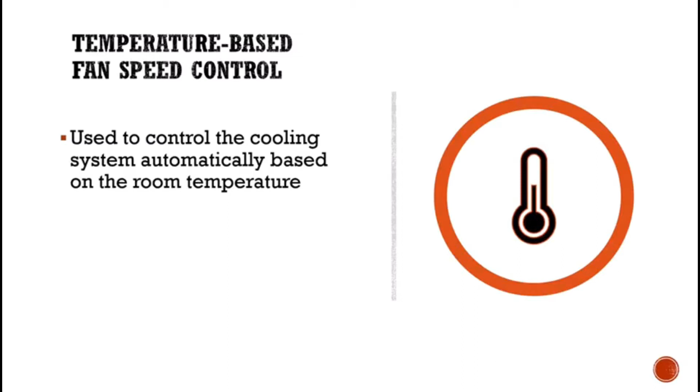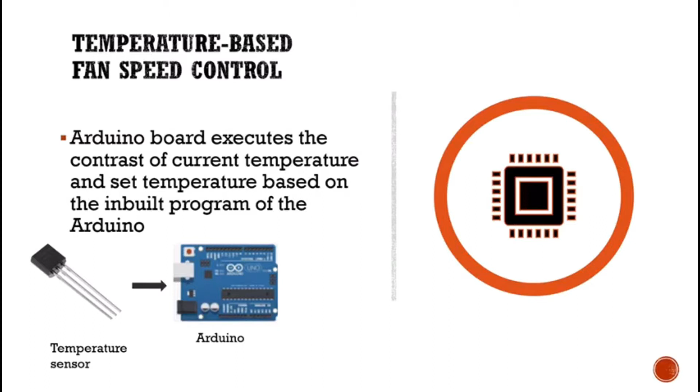The system uses a temperature sensor to detect the temperature of the room. The system uses an Arduino board to implement a control system. Then the Arduino board executes the contrast of current temperature and set temperature based on the inbuilt program of the Arduino. The generated pulse from the board is further fed to the driver circuit to get the preferred output to the fan motor.

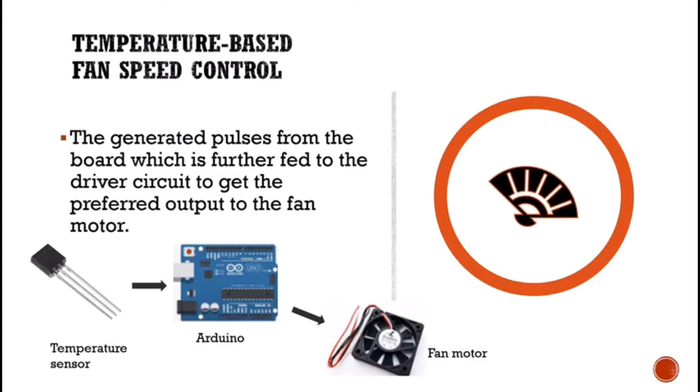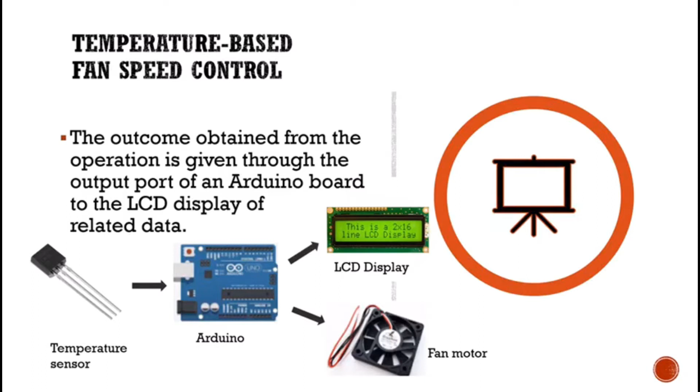The outcome obtained from the operation is given through the output port of an Arduino board to the LCD display of related data. Hence, the speed of the fan is determined by room temperature. As example, the speed of the fan will accelerate at the peak noon, but at night, the speed of the fan will decelerate because the temperature at noon is higher than the temperature at night.

Problem statement. Why use smart fan? Sometimes the use of electric fans is a waste of energy due to human attitude. People or users also mostly demand something that can be easily used without wasting their energy and time. Most people feel the inconvenience of changing the fan speed level manually when the room temperature changes.

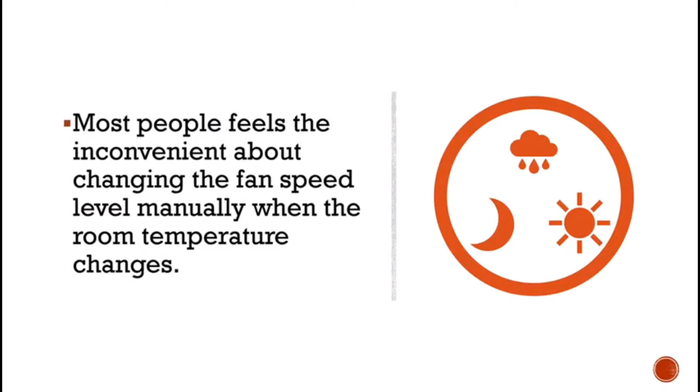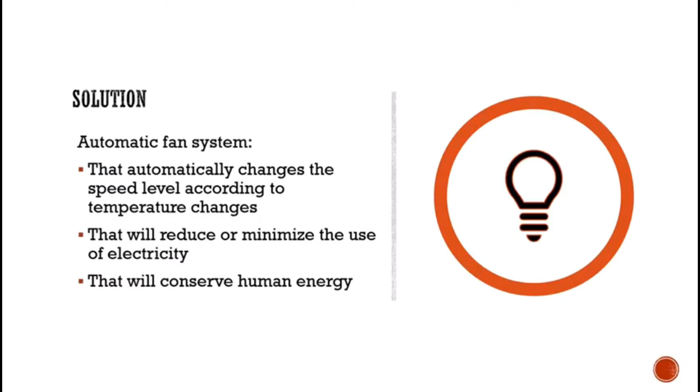In order to overcome the problems, this project developed an automatic fan system that automatically changes the speed level according to temperature changes. Then the system will reduce or minimize the use of electricity, and it also will conserve human energy. So, it is recommended to use smart fan to solve this problem.

Objective. The objective for this mini project is to study and apply the Arduino code and components in Tinkercad software for the specific product application. Second, to develop an automatic fan system that can change the speed level due to the environment temperature changes.

Third, to achieve comfortable surrounding air based on the environmental temperature and time. Next, to reduce and save the electricity consumption in daily use. Lastly, to save the time and energy for adjusting the fan speed based on their surrounding temperature.

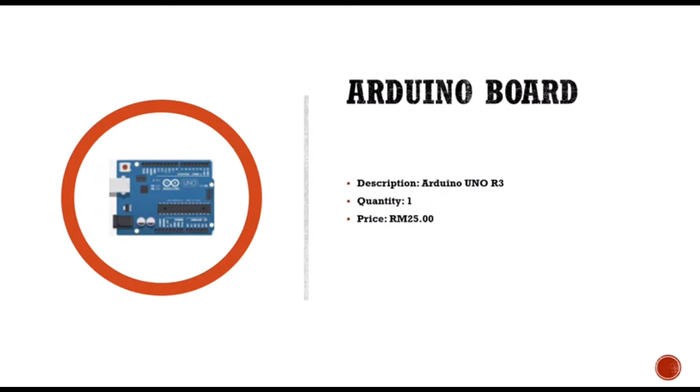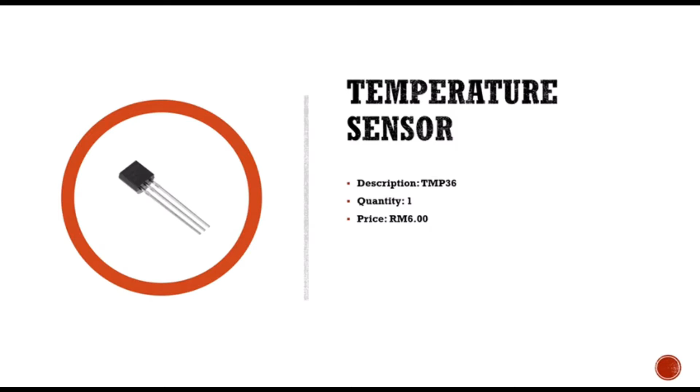Electronic component detail and cost. First is Arduino board. We use Arduino Uno R3 type for our mini project. Second is temperature sensor. We use it as the main component in our mini project. Basically, it is used to detect the surrounding temperature. Third is the LCD display. It is used to show the surrounding temperature and the speed of the fan.

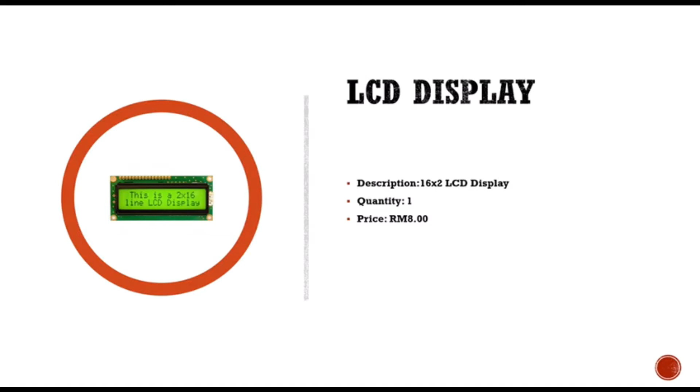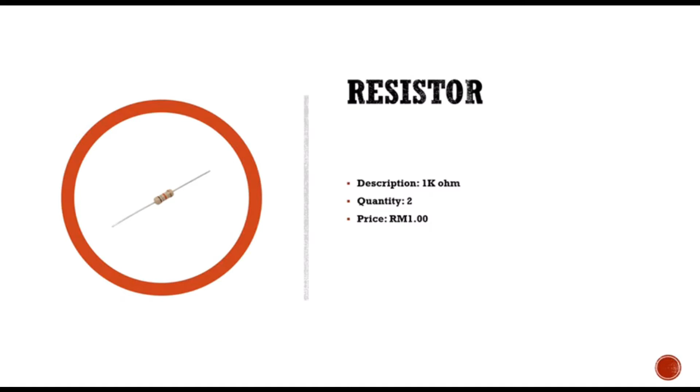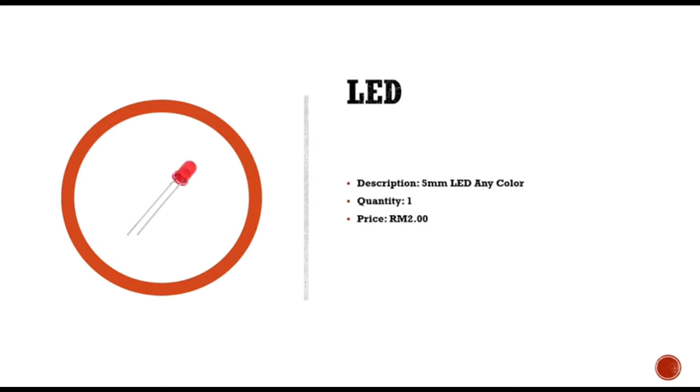Next is resistor. We use two resistors in our circuit of this mini project. Then transistor, diode, capacitor, LED, and power supply. We use a 9-volt battery or adapter as power supply in our smart fan mini project. Connecting wires. We use the connecting or jumper wire to connect our components in the circuit.

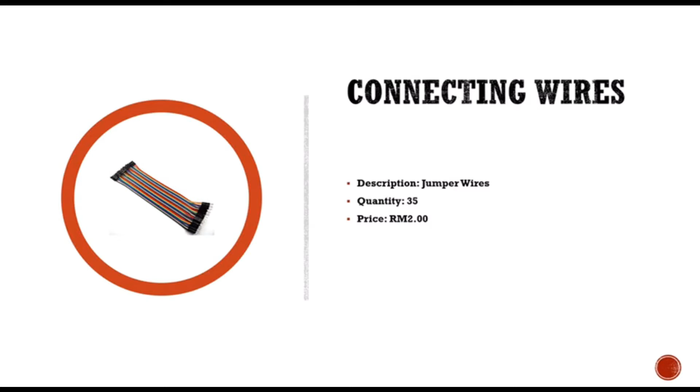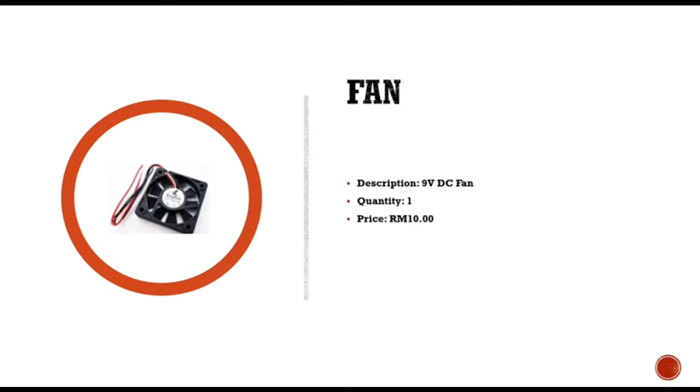And of course, we use a fan as our product is a temperature-based smart fan. And we use a 9-volt DC fan. Lastly is breadboard. We use it to connect all those components on it. Circuit diagram. So this is the circuit diagram for our smart fan mini project.

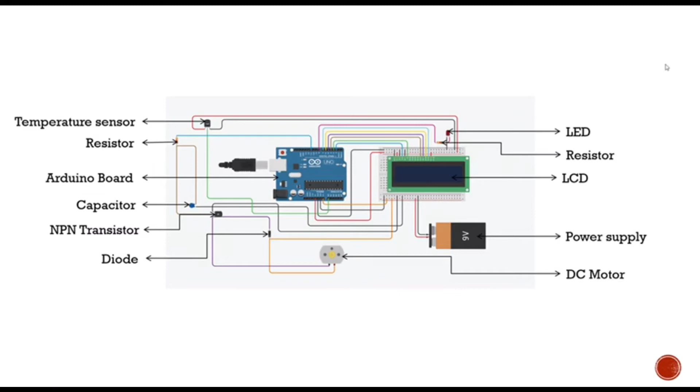As the system is running, the LCD will display the temperature and percentage of fan speed. At the current virtual time, 12 noon, we can see that the motor rotates at average 300 rpm. LCD is displaying the current temperature 34 Celsius and the current percentage of fan speed 73%. As we fast forward the time, we can see that the temperature is decreasing. So, at the current time, the LCD is displaying the current temperature 24 Celsius and current percentage of fan speed 30%. The motor is rotating at average 90 rpm.

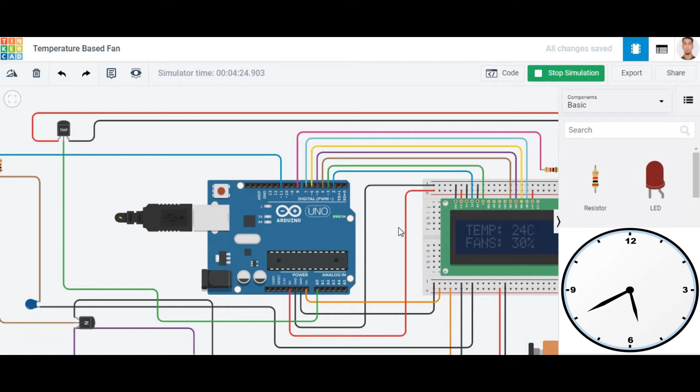The LCD then will continue to display the temperature and percentage of fan speed in real time. As we fast forward the time again, we can see that the temperature is increasing. So, for the current time, the temperature is 33 Celsius, so the fan speed will increase to 69%. So, the main objective of the system, to change the fan speed based on temperature, is achieved.

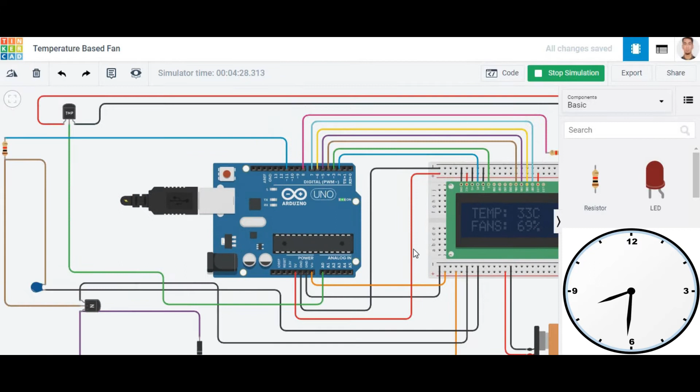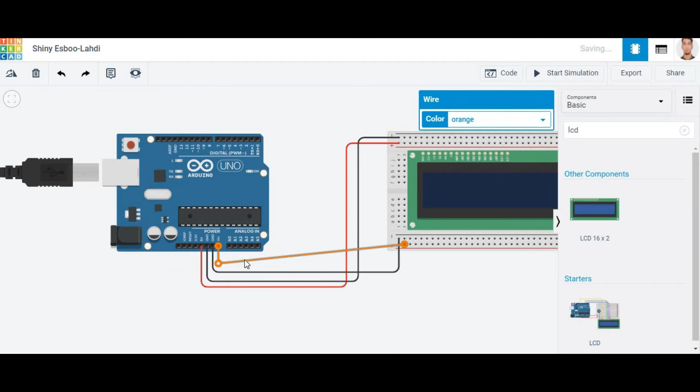First, take Arduino, breadboard, and LCD display. Connect 5-volt power supply, ground, and input voltage to the breadboard. Connect LCD to the ground and voltage common collector to the power supply. Then, connect each data bit to the selected pin.

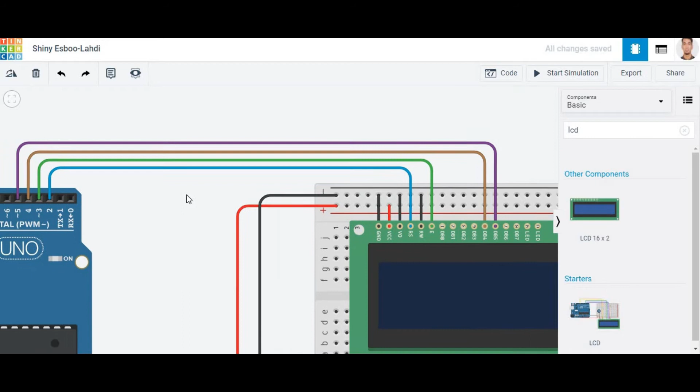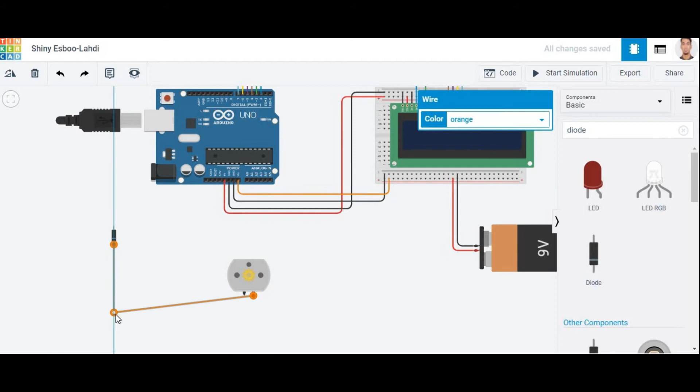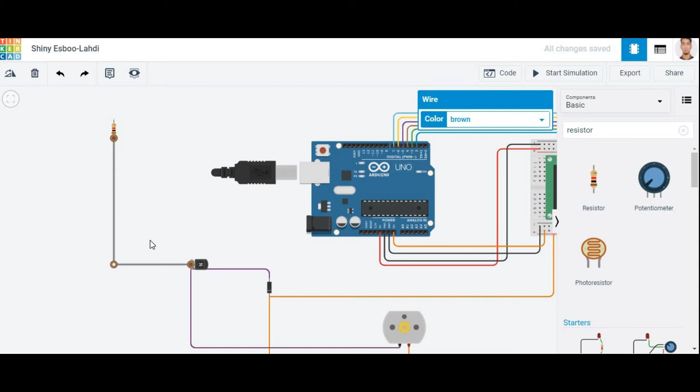Take battery and connect the ground and power supply to breadboard. We use DC motor to simulate the fan motor. Connect to the diode and input voltage. NPN transistor is used to amplify the weak signal entering the base and produce strong amplified signals at the collector end. The collector is connected to the positive input voltage. Connect the DC motor connection to pin 11.

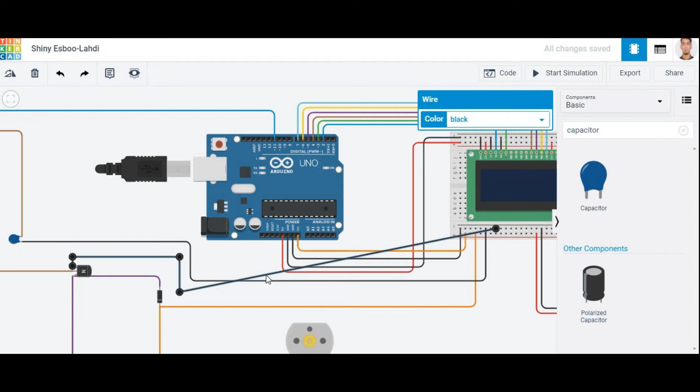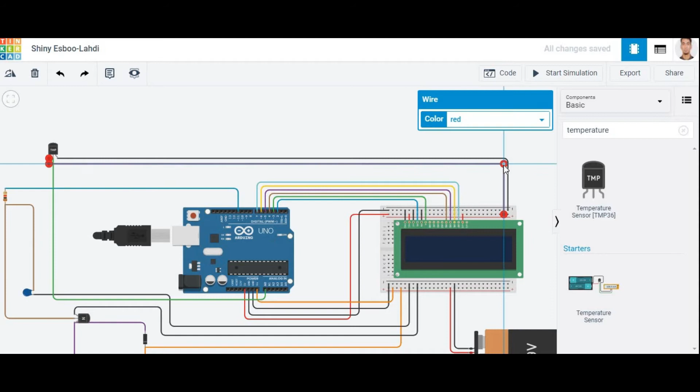Take the 10 mF capacitor and connect to the DC motor connection and ground. Connect emitter to the ground. Take the most important component, temperature sensor, and connect to the analog pin, ground, and power supply. Take LED and 1 kΩ resistance and connect to pin 8 and ground.

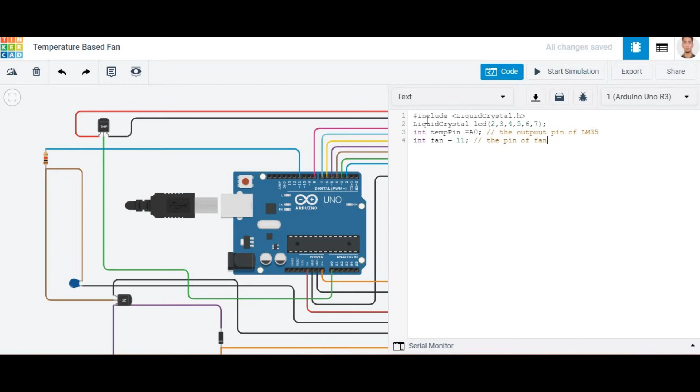Include liquid crystal from library to allow Arduino board to control the liquid crystal display or LCD. Define the numeric variables by integers. Use pin mode function to configure the pin into output or input. Make a loop function to make the function run over and over again. Set the range of temperature for the fan speed range. Use LCD print and its data and base to display the temperature and fan speed percentage.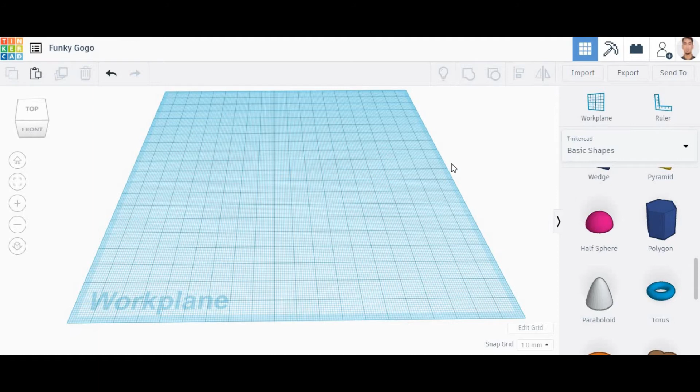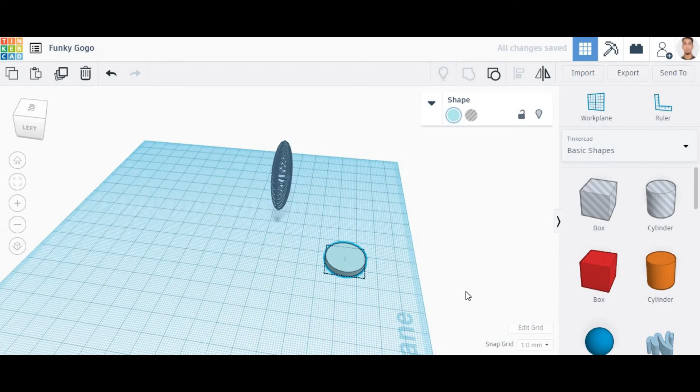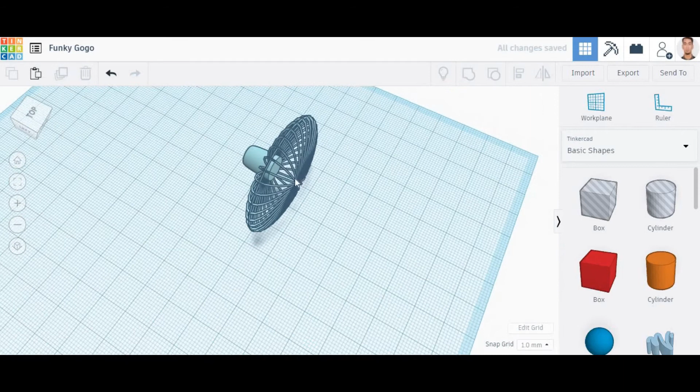Firstly, we make a fan guard. Fan guard is used to provide a physical barrier around spinning fan blades to prevent accidental contact with fingers or other objects. Next, we make a motor housing. Motor housing is to provide protection to the moving parts inside the motor. Next, we make a front cap.

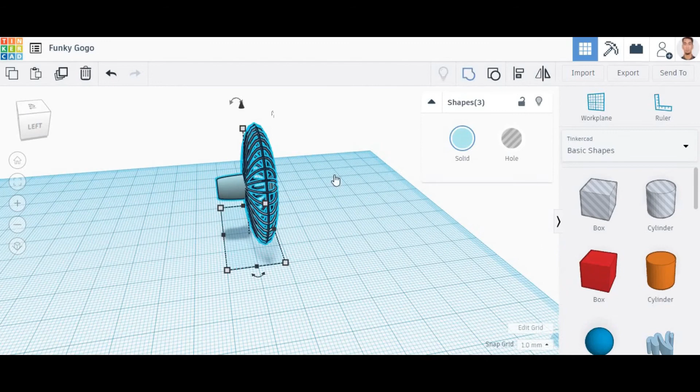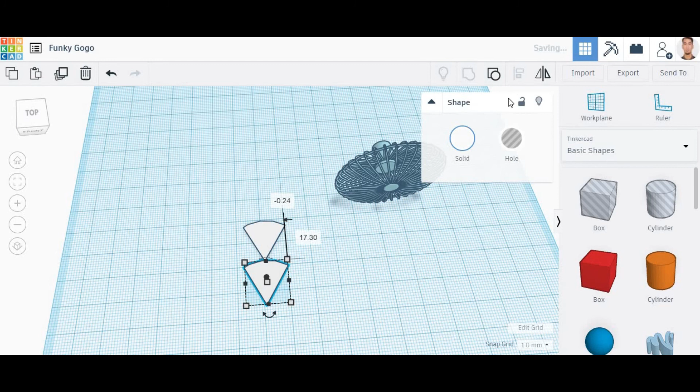Next, we make the blade for the smart fan. Smart fan uses 4 blades as it will be less noisy, so it will decrease the noise pollution.

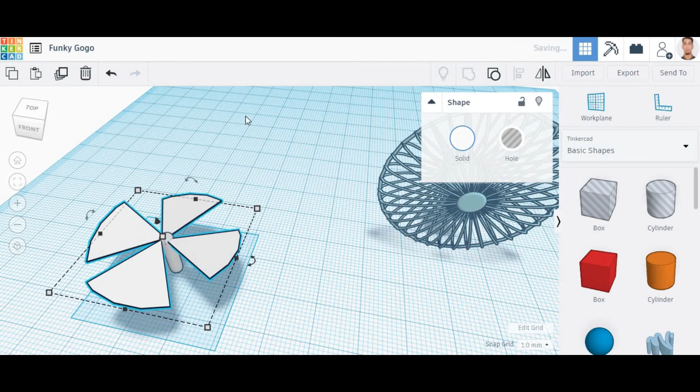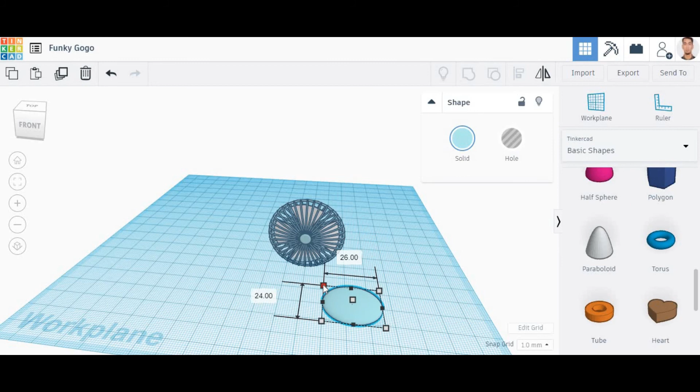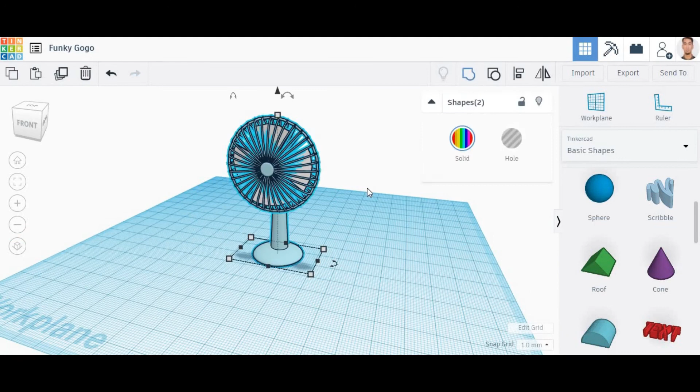Now we finish the upper section parts of the smart fan. Next, we continue the lower section of the fan. We make the stand base and stand. The height of the stand is adjusted for the table fan criteria. Next, we make the on-off buttons.

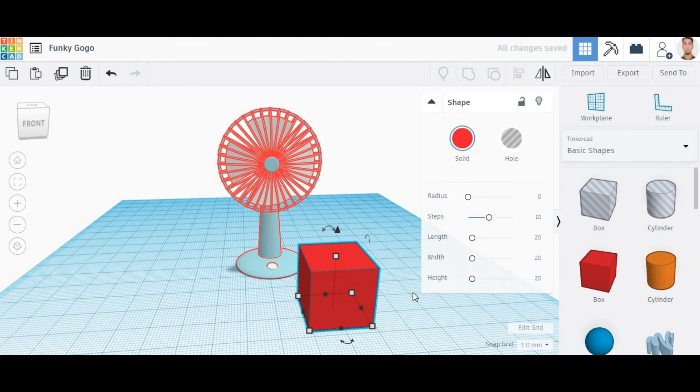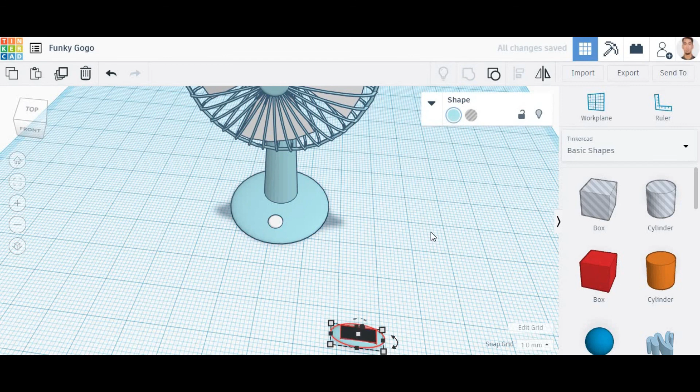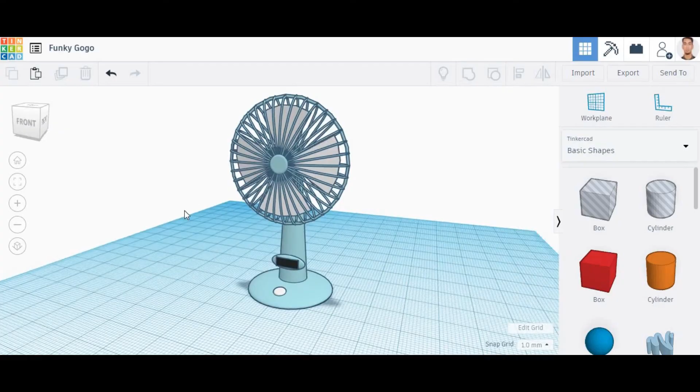And lastly, we make the most iconic part of the smart fan, the LCD display. The LCD display will display the current temperature and fan speed percentage in real time. And finally, this is the full 3D modeling for the smart fan produced by Funky Gogo.